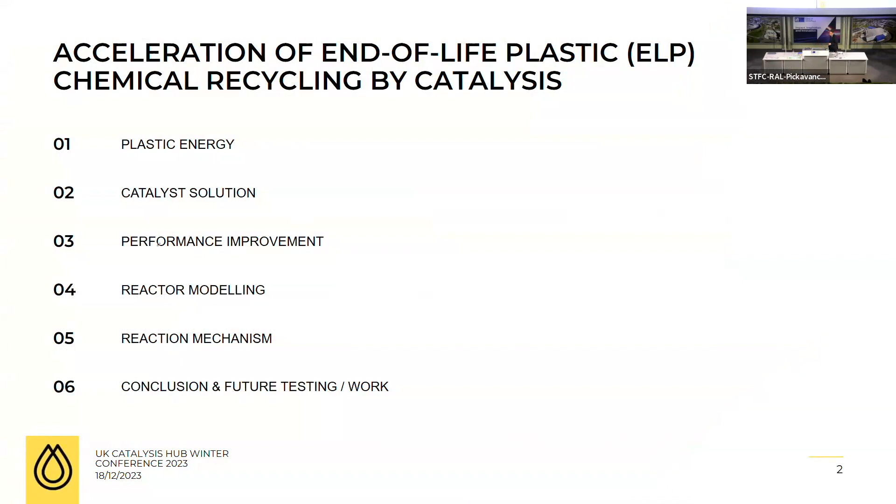So I'm going to talk first about Plastic Energy, who we are, the catalyst solution we develop, how we improved the performance of that catalyst, how we modeled the reactor at full scale, and we are going to propose a reaction mechanism for the first time ever, then conclude and talk about our future work. So first, Plastic Energy, who we are.

That process converts plastic that would otherwise go into landfill, into the ocean, or be incinerated, into TACOIL, which is a feedstock that can be used to actually create virgin-grade plastic. And we are the only global company that has successfully and consistently produced enough feedstock, or TACOIL, to enable the conversion back into plastic.

I think everybody is aware of the plastic crisis, but just to give you some figures: there are 1.8 billion tons of greenhouse gases produced every year due to the plastic life cycle, which is 3.4% of total emissions. Every year, 390 million tons of plastic are produced globally. Of these 390 million, 22 million leak into the environment or into the ocean every year.

Overall, only 9%, so less than 10%, of plastic waste is recycled. 50% is landfilled, 22% is mismanaged, and 19% is incinerated.

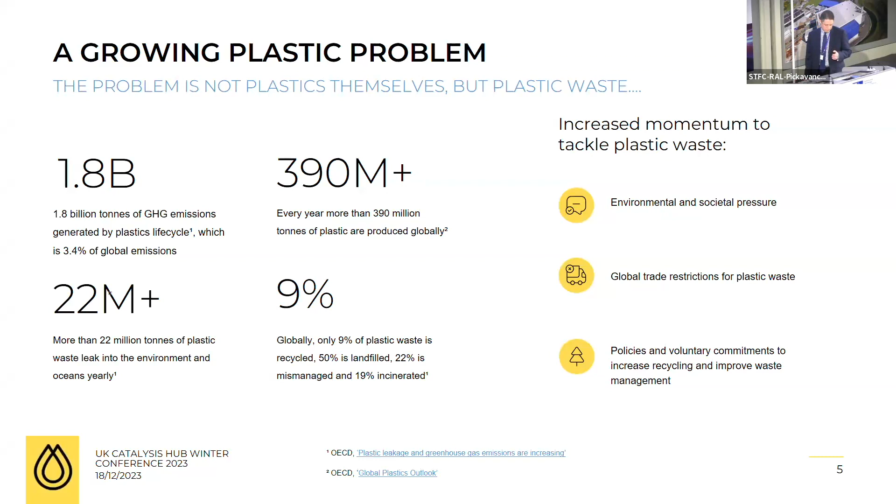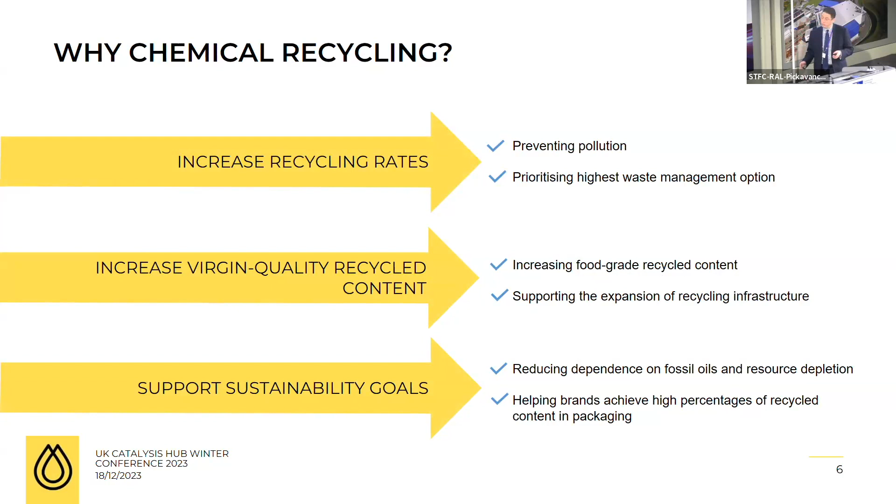So why chemical recycling? First, we can increase the recycling rate, diverting what is going into landfill or leaking into the ocean. We can increase the quality of what is recycled, producing food-grade recycled content. We also support sustainability goals, reducing dependency on fossil fuel and helping brands achieve their recycling targets.

However, not all plastic can be mechanically recycled. So a fair part of the plastic goes then to the TAC plant, where it's converted into an oil, or TACOIL, that then can be used to produce more olefin, which can be used to produce more polymer. And then you create what we call a chemical recycling loop, which can go on like that.

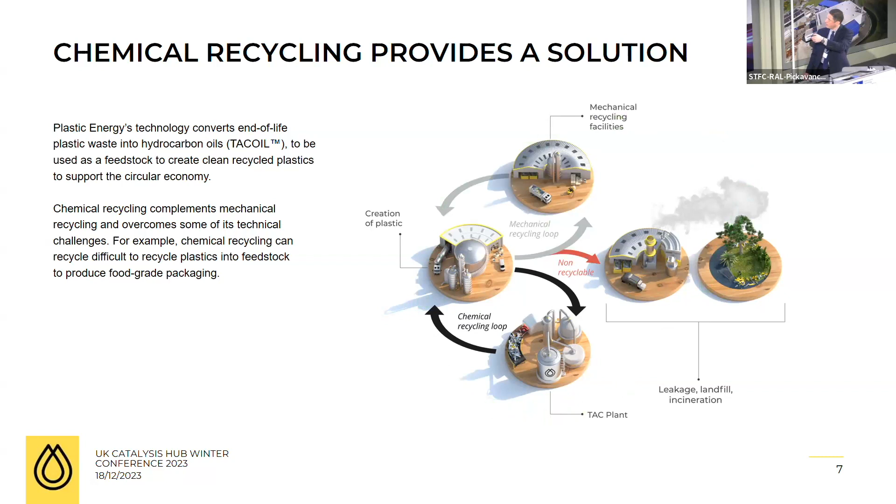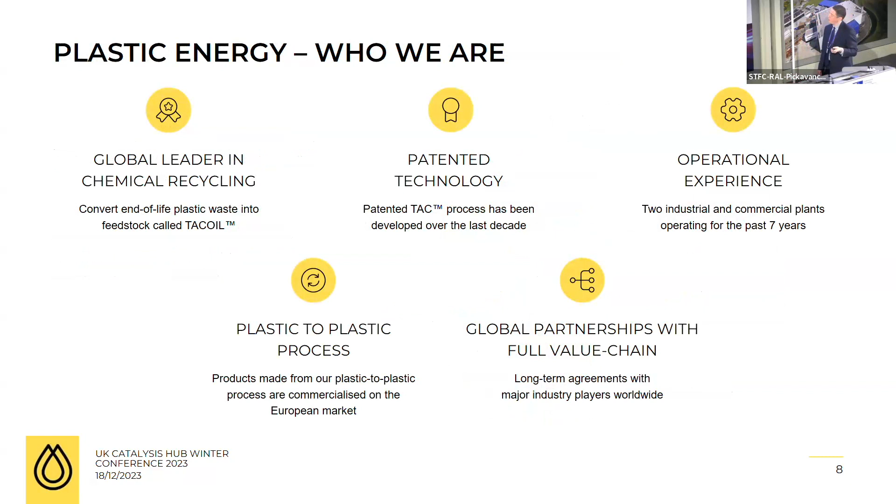So Plastic Energy, who we are: a global leader in chemical recycling. We've got a patented technology that we've been developing over the past decade. We have very strong operational experience with two operational plants that have been running for the last 7 years. We've demonstrated we're able to make a plastic-to-plastic process, with our product commercialized on the European market, and we have global partnerships with major players worldwide.

So what is our mission? First, reduce pollution by improving waste management, diverting plastic from landfill or incineration, creating a circular economy and a plastic loop. Increase the recycled content of what is produced, including food-grade plastic for higher quality, reduce the oil dependency of the countries we work with, reducing fossil oil consumption, and boost the local economy by creating jobs.

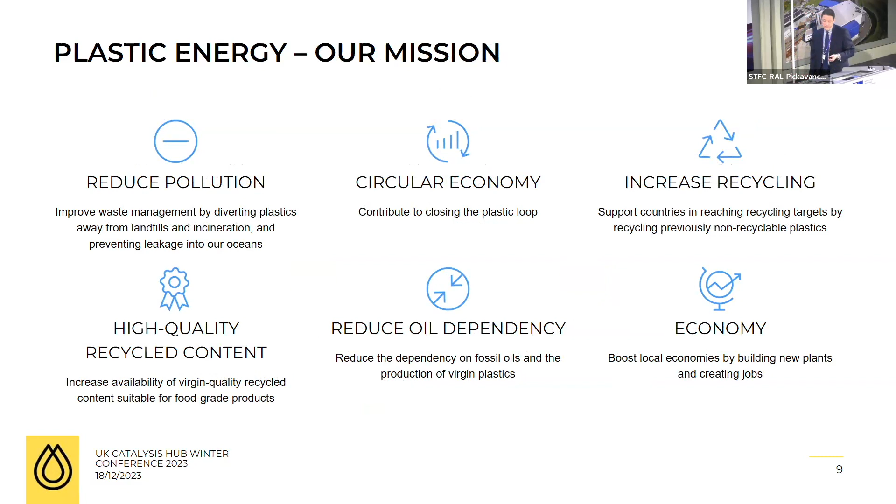So what is our feedstock? You can see here it is basically real end-of-life plastic. It is dirty, it is not virgin plastic. It is mainly LDPE, HDPE, PP, PS, all end of life. What we can still process, but in lower quantity, is PET, PVC, EPS, and category 7.

What are we producing? We're producing an oil, you can see here, that we call TACOIL. That TACOIL can then be taken by petrochemical companies, fed into their steam cracker to produce more olefin, which is then used to produce more polymer, some circular polymer.

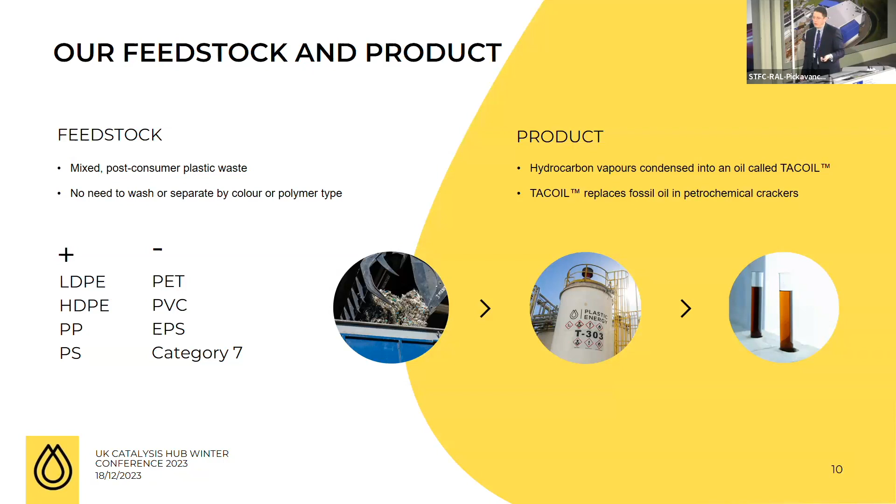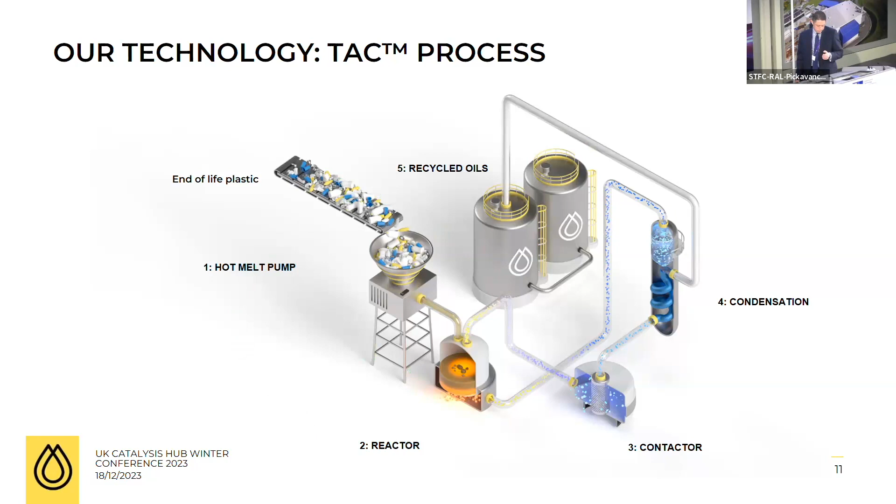So what is the catalyst solution we developed? First, just a reminder: when we use a catalyst, we decrease the activation energy and open another reaction pathway. In the past, during my career, generally speaking, when you don't use a catalyst, you don't see any product. I've been working for a very long time on Fischer-Tropsch, and that was the case. Here in the slide, I'm going to show you that if you don't use a catalyst, you still have a conversion since you still do the thermal treatment. I just wanted to point that out before going to the next slide.

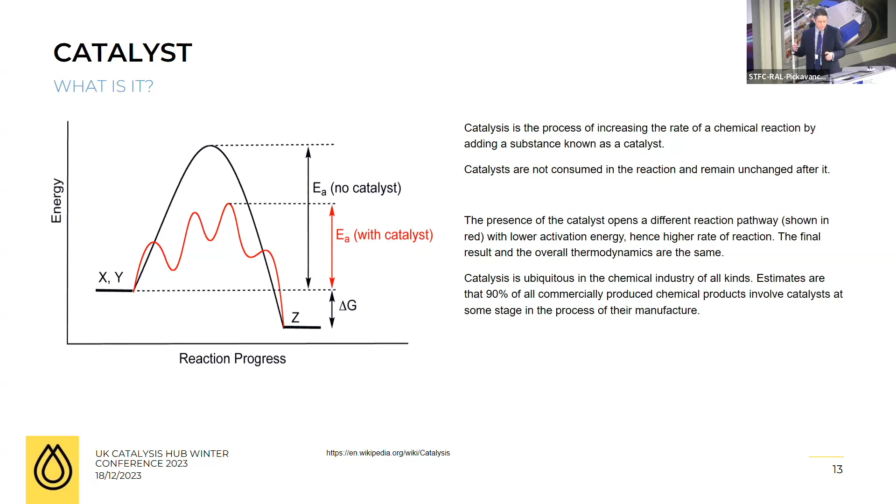So what type of catalyst have we been using? We've been using zeolite, especially ZSM5 zeolite. That is basically an aluminosilicate zeolite belonging to the pentasil family of zeolite. It is characterized by the acid sites, silica to alumina ratio. There are internal pores and external surface, with porosity including micropores and mesopores, and different acid numbers, different also by their strengths. It is largely used industrially for different reactions like carbon-carbon bond cracking, isomerization, dealkylation. It's interesting for us because it's produced at ton scale every year, and so this material has consequently a lot of potential for catalyzing end-of-life plastic pyrolysis.

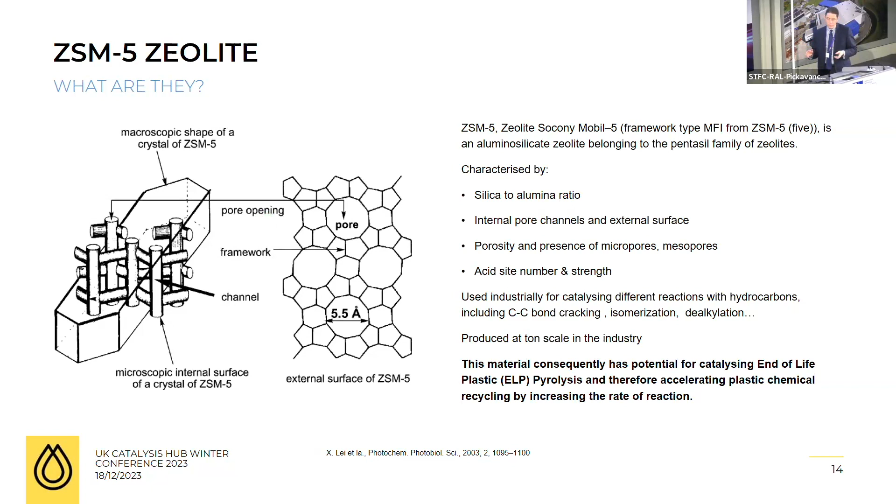So how did we start? We started simply with 5 commercial zeolites that I'm sure a lot of labs in the UK have around, which are basically the 5 ZSM5 you found on the website from Zeolyst International. They differ mainly by their silica to alumina ratio, from 23 to 280.

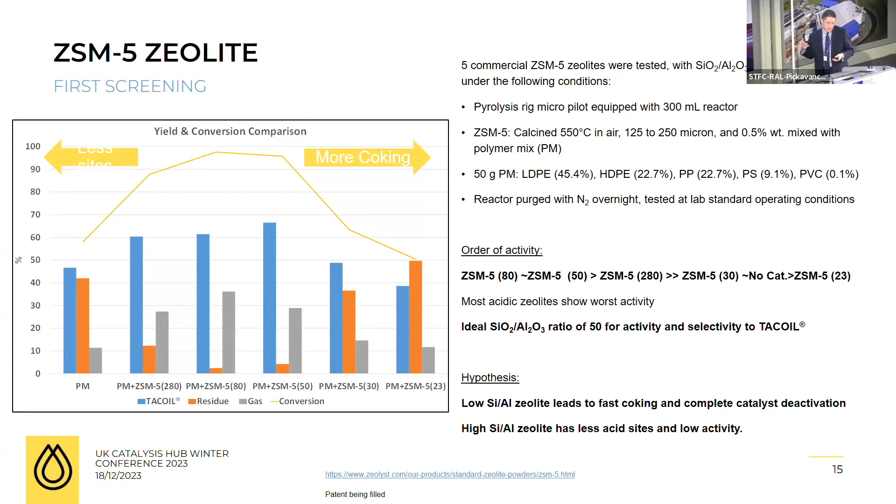So we tested that at a very small scale first on our micropilot reactor, which is basically equipped with a 300 milliliter reactor. The ZSM5 were calcined first in air at 550 degrees C, sieved between 125 and 250 micron, and were basically mixed with plastic polymer mix at 0.5% weight. And the polymer mix is basically a mix of LDPE, HDPE, PP, PS, PVC, and this represents what we get in our feedstock.

The reactor was obviously purged overnight with nitrogen to remove any presence of oxygen. And then we do the test for 2 hours at high temperature. And what do we observe?

So to our great surprise, we saw that the most acidic zeolites, ZSM5 23 and 30, actually show the lowest activity. And even compared to the thermal run, it doesn't show more activity, so it's basically showing no catalyst activity. On the contrary, ZSM5 50 and 80 show the best activity and almost fully converted the batch. Then ZSM5 280, which is the least acidic one, is showing lower activity. So to our great surprise, the optimal silica to alumina ratio is 50 for activity and selectivity to TACOIL.

So at the time, but I will come back to that later in the presentation, we had the hypothesis that with a low silica to alumina ratio, we got fast coking that completely deactivates the zeolite. And with a high silica to alumina ratio, we got fewer acid sites, which basically reduces the activity of the catalyst.

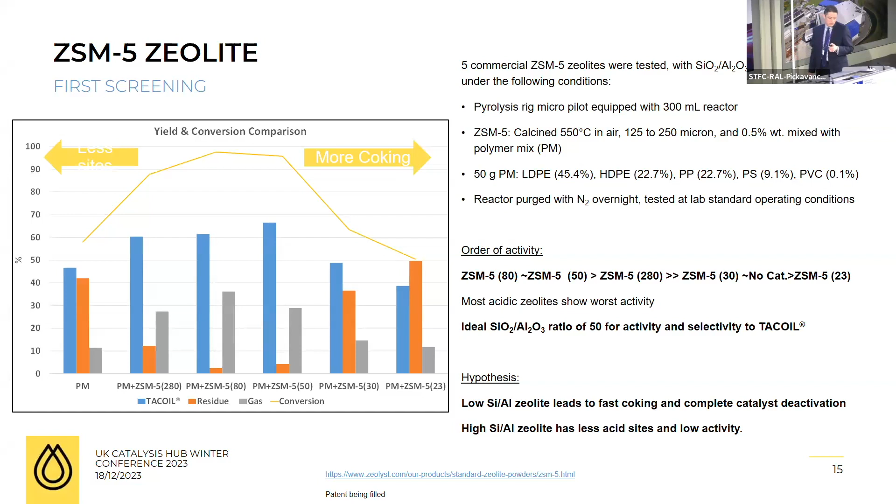First, I used a software called JMP software, a statistical software that is very good at, when you've got different results, relating the results to the physico-chemical properties of the zeolite. So I put into the software a lot of different parameters - acidity, silica to alumina ratio, anything I could find. But basically the two parameters that worked best were mesoporous volume and external surface area, and that correlates quite well with activity.

And what does it tell us? That basically the zeolite with the highest mesoporous volume shows the highest activity.

This suggests, so consequently, the pyrolysis reaction happened by pore mouth catalysis. So this gives us directly a pathway on how to improve the performance of the zeolite by basically increasing the external surface area or the mesoporous volume by doing some desilication.

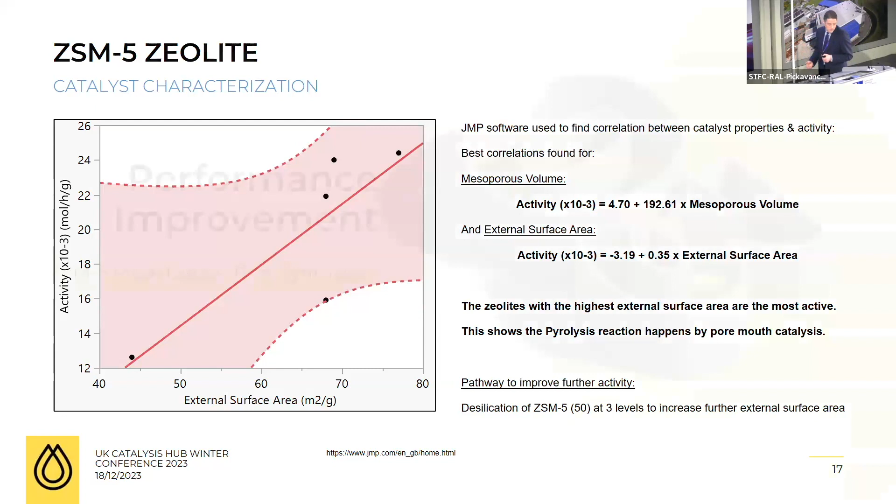So how did we get onto that? I've simply been using a recipe from the literature, doing three desilication with different concentrations of sodium hydroxide, at 80 degrees C, 500 RPM, for 30 minutes. Then I did ion exchange with ammonium nitrate, 1 molar solution, calcination at 550 for 4 hours. The ZSM-5 is pelletized, crushed, and sieved between 125 to 250 micron.

And what do we observe? So for all treatments, basically the mesoporous volume is significantly higher, so between 0.17 to 0.21. At the same time, the microporous volume is reducing, which is expected, since you can have blocking by silicates.

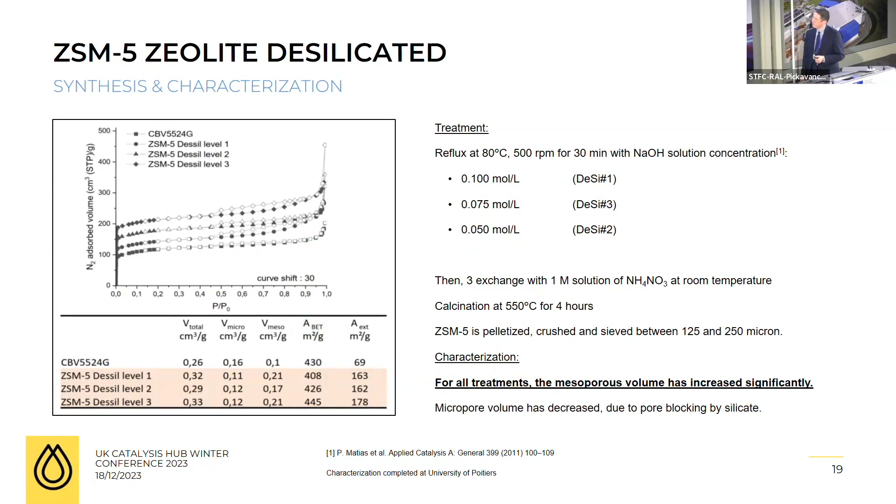Then we've been trying to understand what was the impact on the reaction rate. For this, we did TGA measurements at 5, 10, and 20 degrees C, trying to determine the 3 parameters of the kinetic equation: the pre-exponential factor, activation energy, and order of reaction. We use a sequential method: first the Kissinger method to determine the activation energy and pre-exponential factor, then the Coats-Redfern method to determine the order of reaction, which was always first order when the catalyst was used. Then we did a final optimization to minimize the error using the Excel solver.

And what do we observe when we compare the parent zeolite with the three desilicated one? As I said before, it's all first order, which is expected, and the activation energy didn't change too much, to be honest, but the pre-exponential factor changed a lot. We got a ratio of almost 100 between desilicated zeolite and the ZSM-5 50. This shows that we haven't changed fundamentally the mechanism of reaction, but what we changed is really the way the reactants are actually diffusing much quicker to the active site of the zeolite.

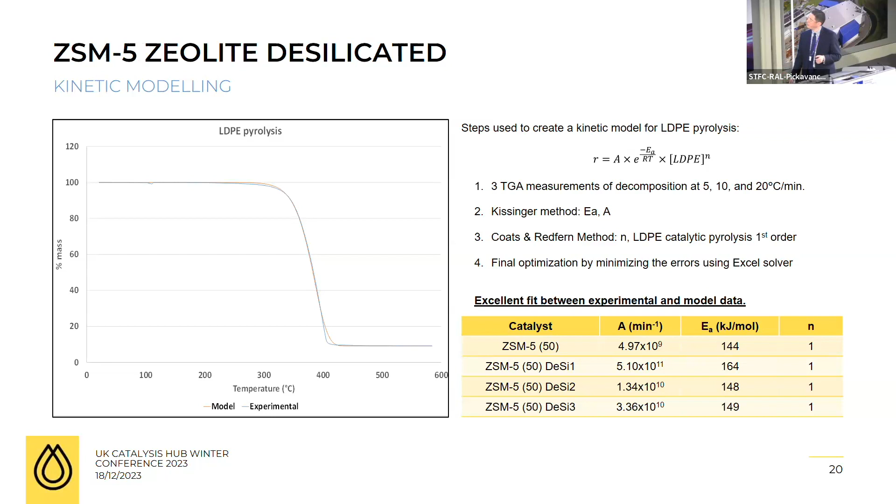Then we tried to compare those results with the thermal case, which is basically no catalyst. We calculated the rate of reaction each time, that is the initial rate of reaction at a concentration of LDPE of 1. We normalized the results first to the thermal case with no catalyst. As you can see, whatever zeolite you use, even the parent zeolite, is significantly more active than the thermal case. Then in the third column, we normalize compared to the parent zeolite, and here we see also an improvement. What's interesting is that the improvement is bigger as the intensity of the treatment increases.

All of that leads us to say that the reaction happens mainly by pore mouth and key lock catalysis. This was introduced mainly at the beginning of the year 2000 by Professor Johan Martens with hydroisomerization of an alkane, and it showed that basically the molecules are mainly reacting at the entrance of the pore or on the external surface.

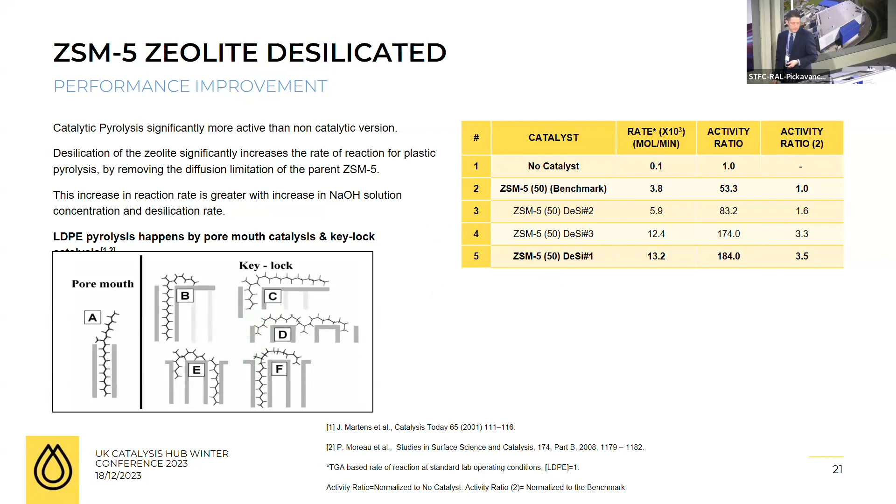And then we didn't stop there. We tried to model the process at full scale, at the scale of the plant in Spain. So how did we get onto that? We used another software called Aspen Plus Dynamics.

We had to basically tweak the software since it was not especially designed for our plant, so there's been a lot of add-ons onto the normal software. We input different data: the kinetic equation, enthalpy of reaction, polymer property, polymer melt properties, product distribution, reactor geometry, dimensions. Then you can get a lot of output data, like the batch time, the reactor polymer melt fill level and mass, the flow rate of reactor vapor, actual reactor temperature and pressure, and the conversion.

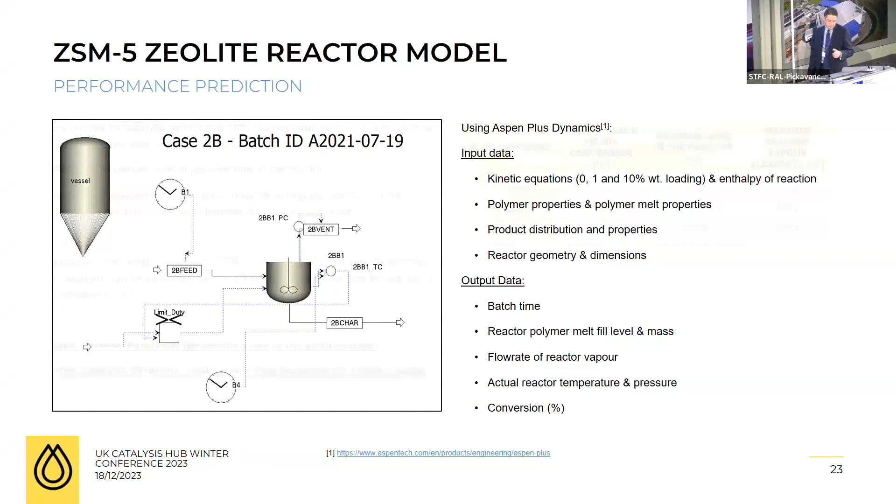So we've been trying to compare three cases: the thermal case with no ZSM5, normalizing all the results to that case, then the 1% weight ZSM5 loading, and the 10% weight ZSM5 loading.

So what do we observe? As the quantity of zeolite tested increases, we see that the batch time is reducing, which is very good for us, since we can then increase the throughput of the plant. At the same time, as expected, the maximum fill level of polymer melt in the reactor reduced, roughly divided by 2 for the 10% case. Obviously, the flow rate of reactor vapor increases, and this is actually fine, since it's still within the maximum allowable flow rate through the contactor.

So we didn't stop there. We tried to see, okay, what happens if we double the flow rate of end-of-life plastic coming into the reactor? What happens? And in that case, that's interesting.

For normal feed rate, we get an improvement of 2.4, which is already very big, and we're very pleased with. But then if we double the feed rate, it's increased to 3.3, which is even more interesting. So this is significant. That shows for the plant that with thermal pyrolysis, the reaction rate is really the limiting factor.

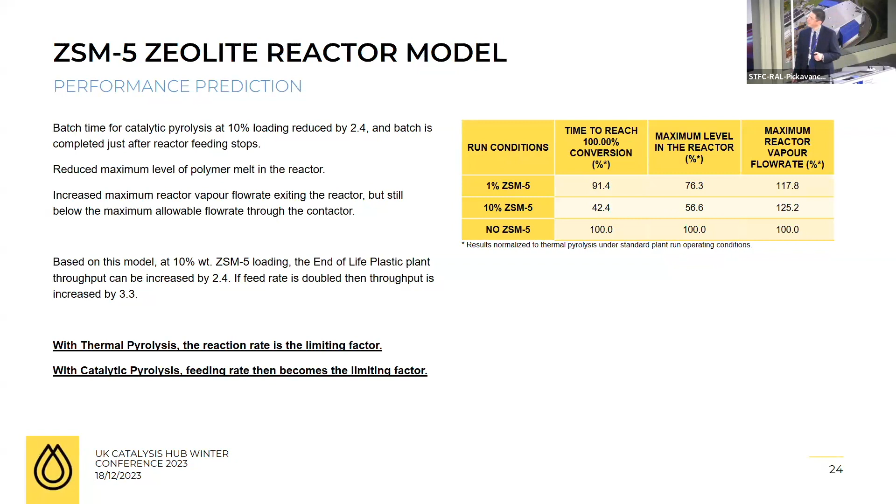Whereas with the catalytic pyrolysis, then the feeding rate becomes a limiting factor. So from now on, we try in parallel all the scale-up work, etc., to understand what is the reaction mechanism, what is happening exactly. So I have to say that this is the first time I show these results.

Okay, so first slide on that: reaction startup. There's been perhaps a lot of discussion on how the reaction is starting up, if it's starting catalytically or if it's starting in a thermal way. You will see we have an opinion on that.

So here I showed just an example I was able to show. Basically we did 2 TGA, so one virgin LDPE, 20 milligram, another one with virgin LDPE and 10% ZSM5. So 20 milligram LDPE, 2 milligram ZSM5. As you can see, here we show the percentage mass versus the temperature.

Basically, the reaction initiates at a much lower temperature for the catalytic case compared to the thermal case. I have to say this is true at any scale we've tested so far. For example, on our micropilot, we follow the gas and tar production, and I can tell you that there is roughly 50 degrees C difference between the thermal case and the catalytic case. So it is really substantial, and for me, beyond doubt.

We did that same experiment for only 2 hours since we wanted to compare primarily the different activity of the zeolites. Actually, 2 of the zeolites fully converted the batch in 2 hours, so they were very active - that was ZSM-5 50 and 80. So we've been doing the same measurement.

What we observed is that for ZSM-5 50, the porosity is almost completely lost - the microporosity is completely lost, the mesoporosity is almost fully lost. But that zeolite is still active, since we are still able to reuse it several times.

Then we compare the result with the 16 hours. What we observe is that a large part of the mesoporosity and microporosity is recovered, which shows that the zeolite is still active and can actually, when there's no more LDPE, crack the coke.

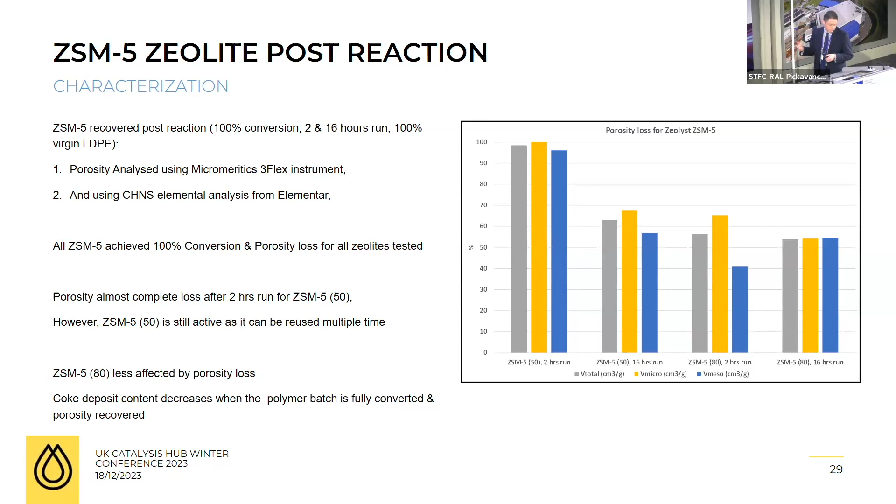Then ZSM-5 80 is not too much affected by pore blockage, and that doesn't change too much after 16 hours. So also an important parameter.

So we did, with our partner from the Catalysis Hub, some Kerr-gated Raman spectroscopy. We've been collecting different Raman spectra at different temperatures with a mixture of LDPE and zeolite, 1 to 3. And then there was a mass spectrometer on the outlet, and we are able to do mass spectrometry to determine the content of the product.

What we saw is that basically we have a buildup of carbon, double bond carbon-carbon containing hydrocarbon, on the zeolite surface as the plastic starts to crack. So we see that with the blue dotted line, the LDPE Raman vibration weakens.

And then we got a buildup of aromatics, monocyclic aromatics, on the surface. So we can see actually those aromatics being produced.

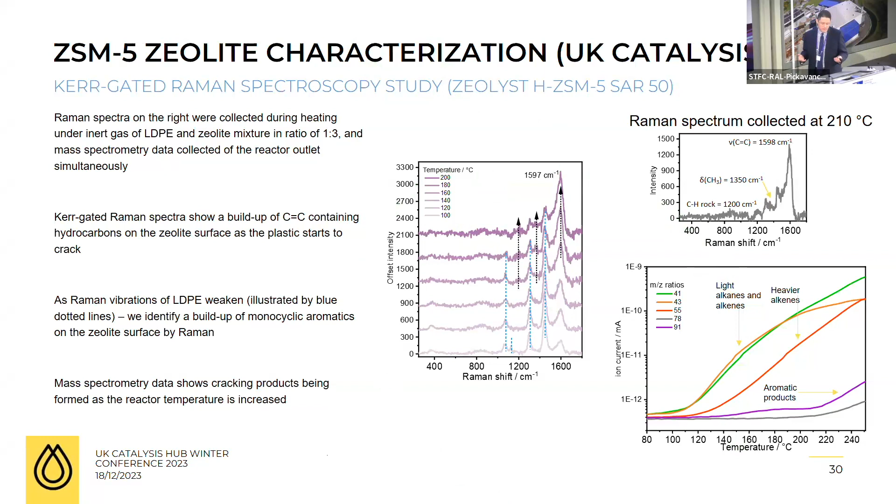But the mass spectrometry is very important, it shows us that basically we are getting the same product that we get in our micropilot and pilot - mainly light alkanes and alkenes, heavier alkene, and aromatic products.

Finally, we've been looking at what is the composition of the coke post-reaction when we recover the catalyst. For this, we've been using a method developed by my PhD supervisor, Patrick Magnoux, at Poitiers University, where we dissolve the coked zeolite in a concentrated hydrofluoric acid.

Then we do an extraction with dichloromethane, and then we inject the soluble part onto the GCMS. And what are we finding?

We find different molecules: naphthalene, substituted mono and D3 naphthalene, fluorene, phenanthrene, anthracene, dimethylpyrene. And you can see you can grow the cycle of aromatics - you can go to very, very large molecules.

Here, the only limit is how much space there is around the molecule, and basically the supply of olefin, of ethylene and propylene.

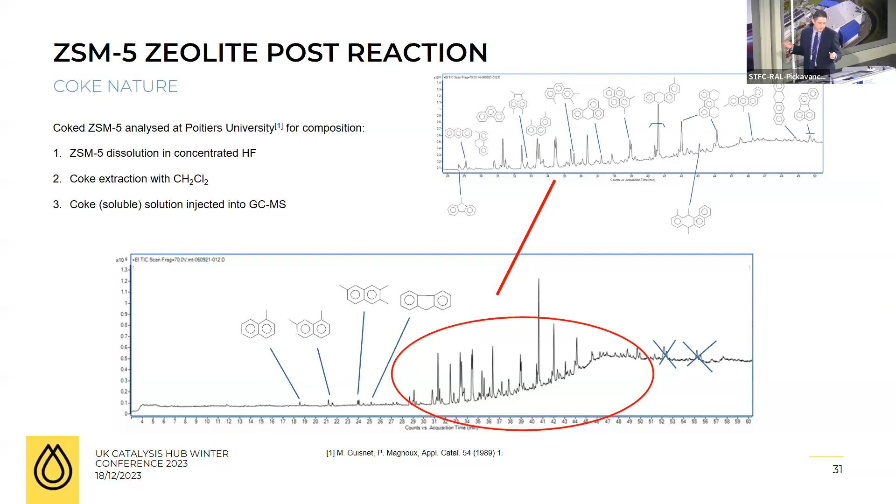Finally, looking at aromatics - here, still on our micropilot at 400, we've been reusing the same zeolite over and over again. And something that came quite striking was the yield of aromatics versus the run number.

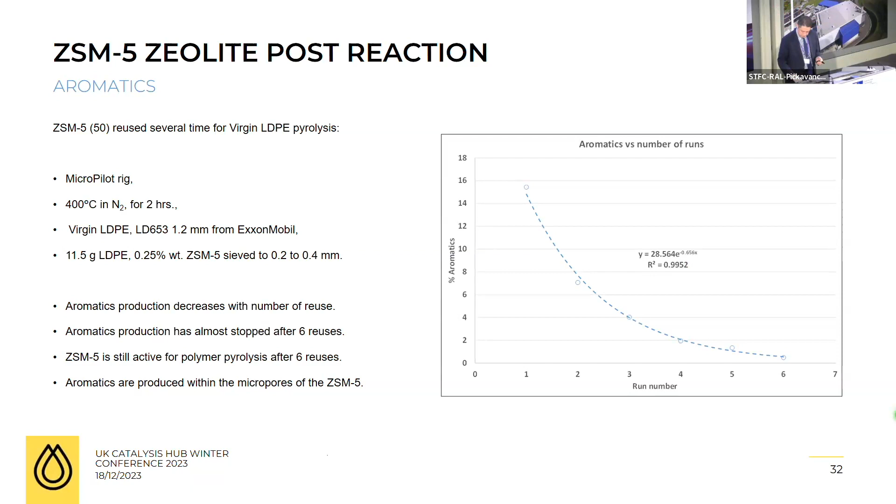So let's get on with the reaction mechanism. I divided that into different stages.

So this is step 1, startup.

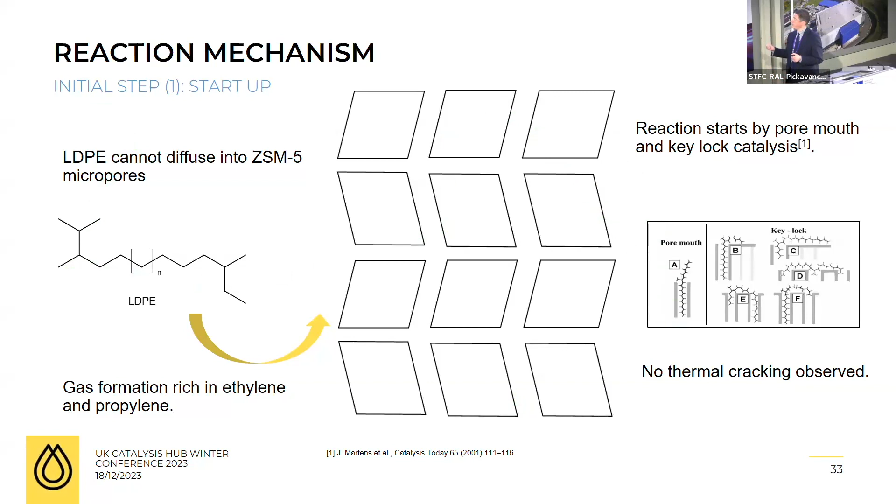And the last reaction you form is basically producing coke, some polyaromatic molecules that start to form either very close to the external surface or really deep within the ZSM-5.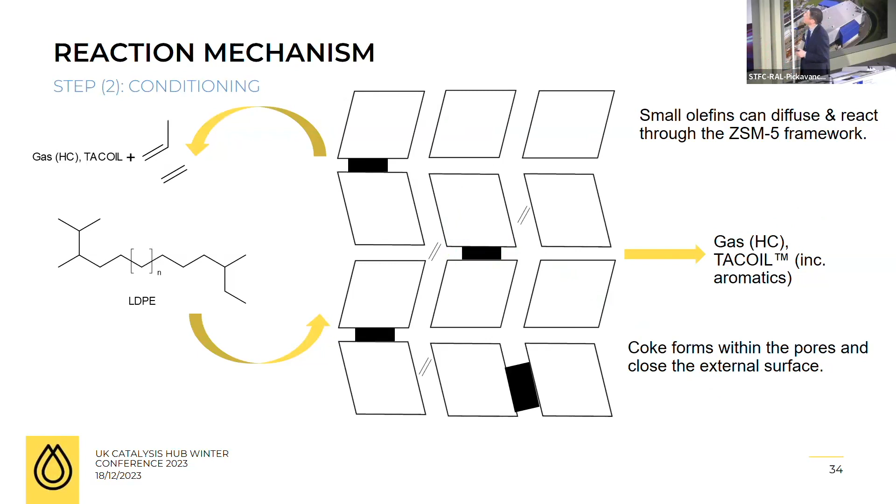Then we go to stage 3, which I call steady state. At this stage, the coke is growing, always growing so long as there's feedstock and space to grow. We still have some LDPE that basically...

...is converted on the external surface. Now it cannot go inside, so basically the microporosity is fully blocked by the coke molecules. This space here is becoming completely unavailable to the reaction.

And it does still react, and it still forms some gas and some TACOIL and some olefins. But that reaction here is not forming anymore, so we don't see the aromatics anymore.

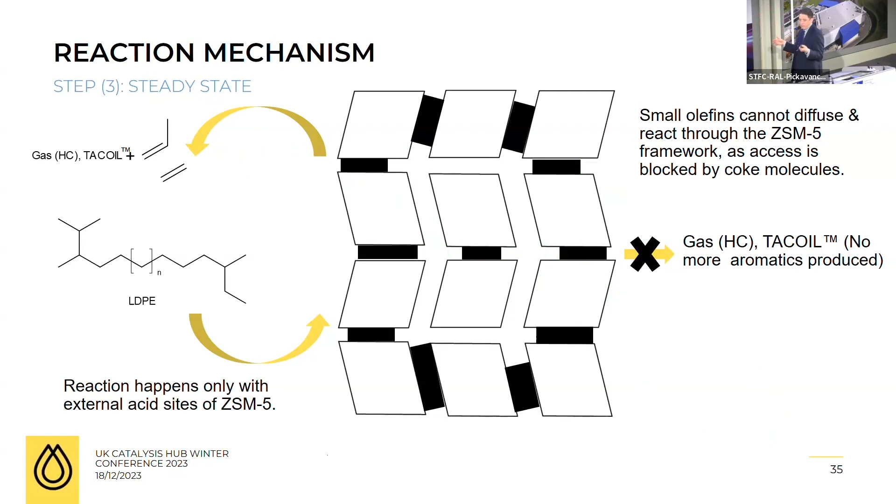And that goes on until you run out of LDPE. Then when you run out of LDPE, what is happening? I call that cooking.

So you just have your zeolite and some coke molecules. The zeolite is still active. If you put more LDPE, that will convert.

But given that there's no LDPE and there's just coke molecules, it starts to convert the coke molecules into gas. So we don't see any TACOIL, it's only gas at that stage, and that gas is still very rich in ethylene and propylene.

Then what you can do is stop your reactor. You can actually do an oxidative regeneration at high temperature of your zeolite.

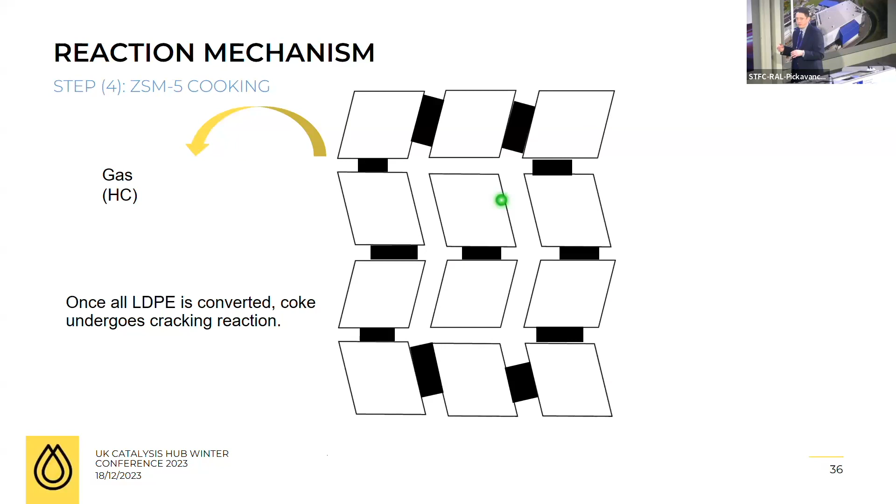So what we observe when we do the oxidative regeneration: of course, before regeneration, the zeolite is black. After, it looks of course very white, though it's not as white as the fresh zeolite. I would say it's more cream color.

And when we do CHNS analysis, you see a bit of carbon. So we think that carbon is really deep inside the molecule, since when we do the reaction again, honestly, from a reaction rate point of view, we don't see the difference at all.

Then if you put more LDPE, you do the same thing. You react on the external surface or in the pore mouth. Then you form some more gas, some more TACOIL, some more olefins that can diffuse inside. You form some more coke that produces some more gas, some more TACOIL, some more aromatics.

And then you go through the cycle, and you can do several cycles of reaction and regeneration, up to the point that the zeolite is basically not active enough to be interesting.

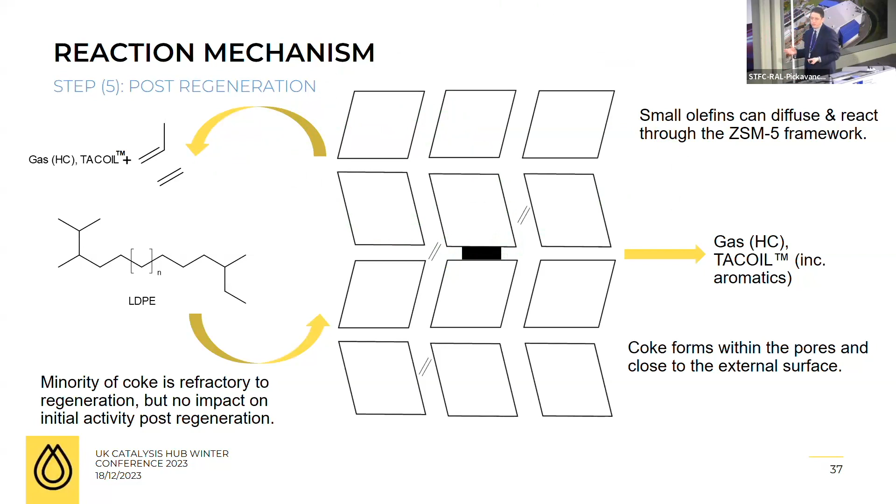So to conclude on that slide, yeah, there's a minority of coke that is refractory to regeneration, but it's not a problem for us because we get the same activity initially.

Then I tried to think, is there in the literature any other example of such a reaction with medium-pore zeolite, which ZSM-5 is, with hydrocarbons? So there are two examples, but there might be more.

And then the second example is basically my PhD, which I did between 2002 and 2005 with IFPEN. I was studying ethylbenzene hydroisomerization. The idea was to form xylene, then to form terephthalic acid, to form PET bottles.

So they wanted to maximize the xylene from the C8 aromatic cut in the refineries, and they found a zeolite called EU1 zeolite that has some interesting properties.

So what we observed was that it was deactivating very, very quickly initially. To show up, yes, the open symbol shows the initial quick deactivation, and then stabilization.

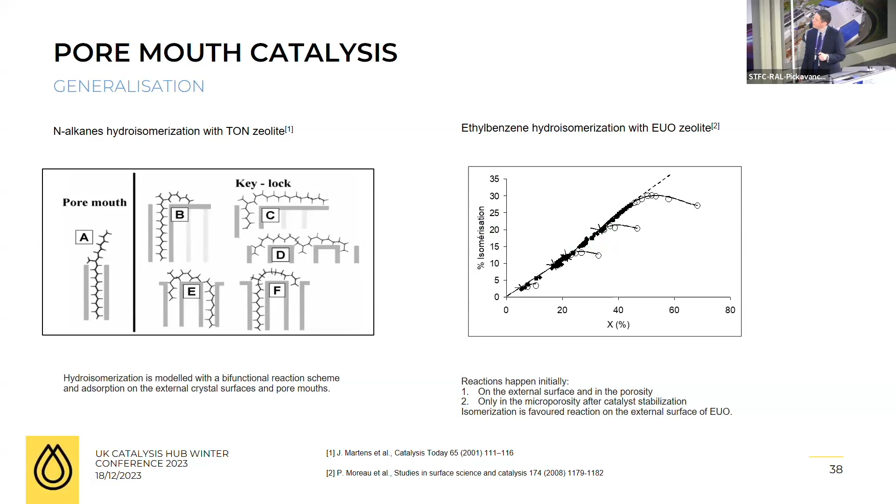So, conclusion and future work. I managed to show that the 25-to-1 zeolite is the most interesting one.

Desilication for us is an efficient and economic method to significantly improve the rate of reaction, the throughput for the plant.

We think that the reaction happened mainly by pore mouth catalysis. The reactor model has confirmed the results we're getting from the kinetic rate. So we can improve the throughput by 2.4 for standard feed rate, and 3.3 for double feed rate.

And this is very good news. I mean, we can process more end-of-life plastic potentially. This shows that the reaction is limited by reaction rate for thermal pyrolysis, and by feeding rate for catalytic pyrolysis.

The final point is that there's a lot of optimization of the plant that will need to be done to accommodate the catalyst, obviously. And I have to say, the purpose of the project was to increase the throughput of the plant. But there's a lot of detailed advantage of using catalyst compared to doing thermal pyrolysis.

I'm not going to get into the details, but it's not only about increasing the throughput. So, future work.

The ZSM-5 formulation had been actually scaled up at our third party this year to 20 kilograms. It was successful. Characterization testing on the micropilot came back positive.

So first, LDPE is by far the main polymer that is produced worldwide, and then you find PP and PS. I can't disclose too much about that because there's been a lot of IP linked to it. So if a customer comes to us, we've got a guideline - the feedstock needs to have no more than this polymer, no less than that, basically. It's based on tests that we did doing different mixes and seeing what happened. There's been a lot of reactor blockage if you use certain polymers. There's been a lot of learning made.

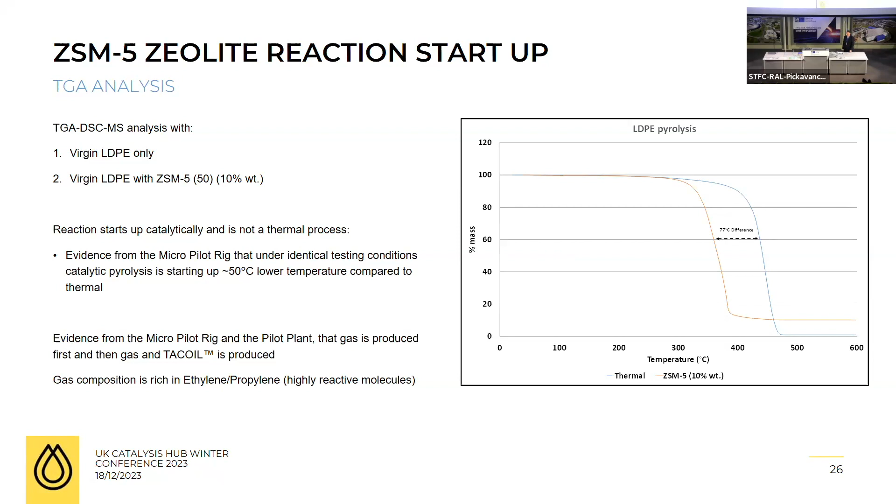And that's what was interesting about having this plant in Spain, being able to test different configurations. Basically, as I say - so I don't know if you can go back quickly. No? Yeah, so basically LDPE, HDPE, PP, PS is what you find mainly. The one we don't really convert is PET. That one is special - it has oxygen, etc., if you do the thermal case. So this one we can process, but we shouldn't exceed - there's a maximum level we can tolerate in our plant.

Thanks, Pierre. That's really interesting, and it's really impressive that you get a 3.3 times increase in throughput.

That's catalyst for you. The other thing that catalysts do is they can change the selectivity - do you see changes in that? So yeah, there's a lot of talk in the literature about what happens when you use catalyst versus not. I would say the selectivity depends on a lot of parameters, and it will depend which catalyst you use first. So the good thing is that actually the desilicated catalyst is more selective to liquid.

That depends on the operating condition, so be careful. For thermal pyrolysis, the optimum temperature is about 400. Currently the catalyst is so active that in order not to be at 100% with our micropilot, we're now at 340. So that shows you 60 degrees difference, which is huge. But to come back to your question, be careful.

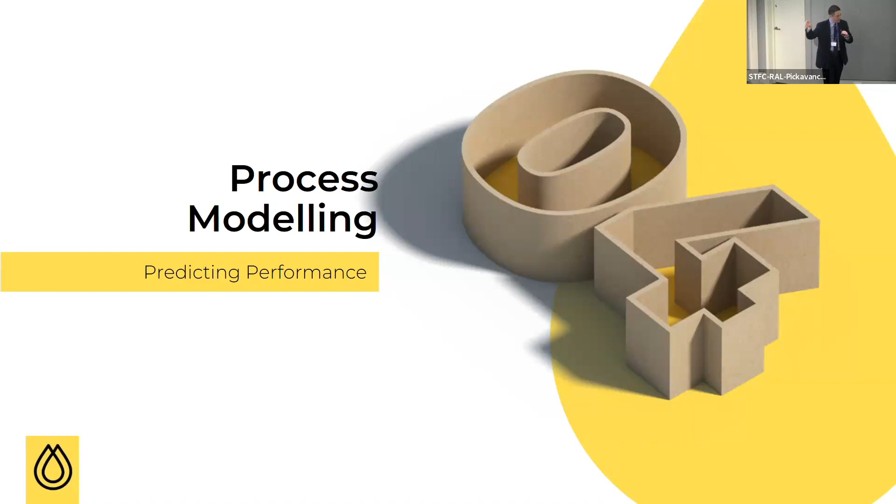Basically, what we get as gas is very close to the output of steam cracking. So be careful, don't forget, you need to fill the whole chain. There's the steam cracking, but outside of it, you don't get a single flow of ethylene or propylene, it's all mixed. So you're obliged to do a cryogenic distillation to separate the different olefins. That is actually very interesting, so that's also a possibility. I saw the question around when we use zeolite, if we could maximize the gas, which is actually possible, but that's two different ways to drive the process.